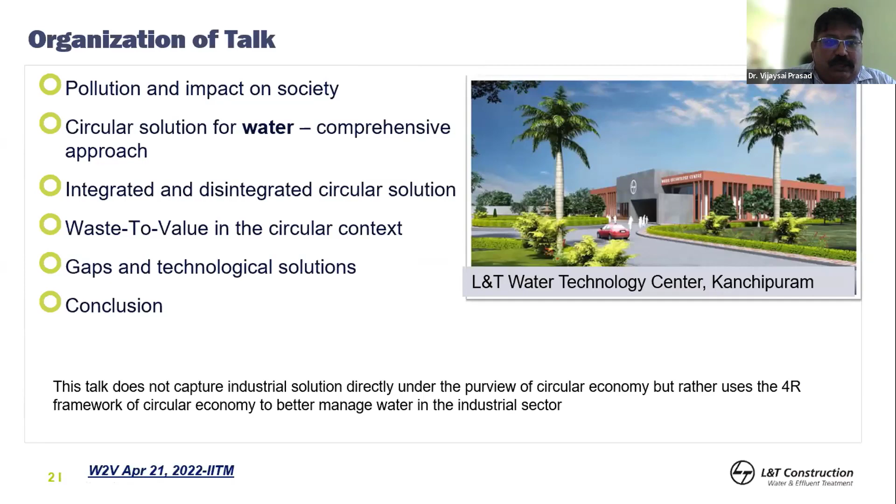So very soon into the next, interesting part here. I always find it quite amusing because it is always said 114 civilizations existed on the surface of this planet, out of which 112 disappeared, and only 2 continue to survive—one being India, the oldest one, and the other China. There are many civilizations that unfortunately we don't get to see—for instance, Easter Island, Mayan, Anasazi, Akkadian, Ubar, and the list goes on. That's plenty of a list there which unfortunately we don't see.

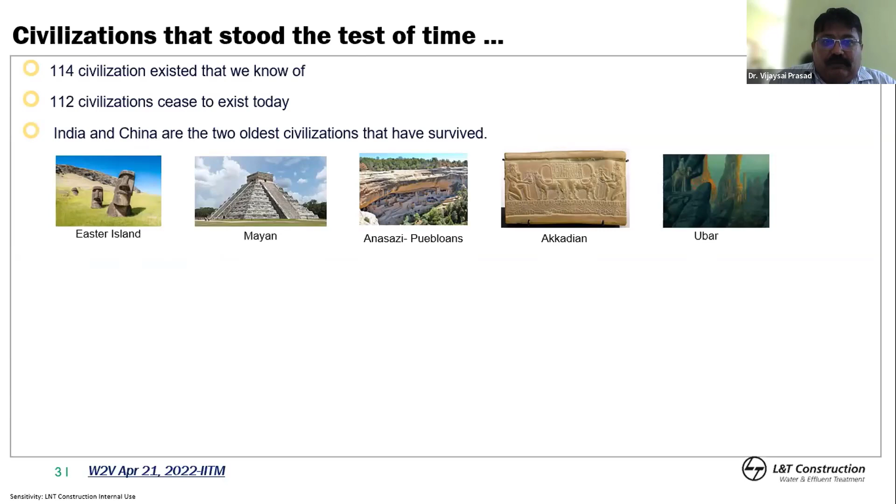So basically, when we look into what has led to the disappearance of these civilizations, the factors responsible—studies today indicate climatic change to be the prime reason. Droughts, the water level receding, and the shifting rain patterns, and several other factors led to the fall of the civilization. But more importantly, the civilization did not adapt to the change, which was the main cause stated. The climatic conditions changed, but this adaptation was missing, and that's why we don't see them surviving today.

Now, having said that, why is it relevant for us? Why should we be caring about it? Because we are already witnessing the trajectory as far as the change in climatic conditions are concerned—9 parameters out of 15, or even 10 out of 15, global tipping points are being witnessed today, which is definitely an alarm that we all have to wake up to. That includes the rise in sea level, the temperature, and glacier melting, and several other factors out of 15 which indicate that climatic change is going to happen. It's happening, and it's reaching a level that is contributing to societal collapse.

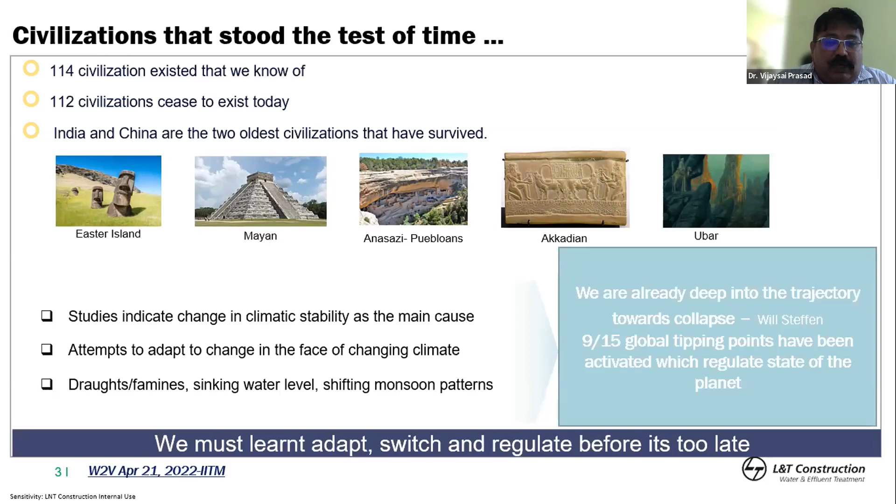This is something that we are forcing upon ourselves, and that's why it's all the more important to regulate before it is too late. With that message, I just wanted to quickly move into the next topic.

These are predictions that are coming from the past. In 1970, Alvin Toffler, a famous US writer, published an interesting work on how we as a civilization moved through different phases: the agrarian wave, the industrial wave, and the information wave, all of which have happened in the past. Now we are in the information wave at present. The transitions have been very interesting - some took several thousand years, some happened in centuries, and the last one, the information wave, took just about a few decades. That's where we are today.

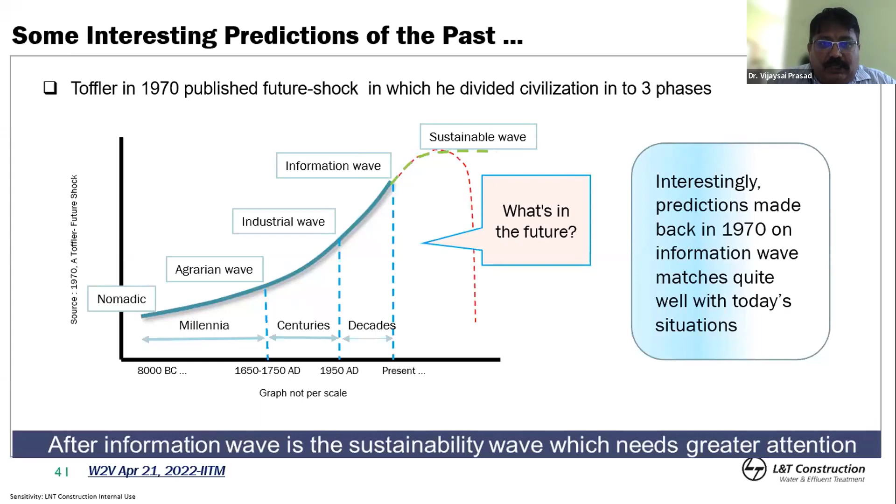But the question is, that's all good, so what is in the future for us? That is what we call the sustainable wave. Maybe the curve will plateau down and then sustain, helping us with all these things. But the way in which we have been exploiting, extracting, and misusing and abusing resources - will it allow us to stay there, or will it plummet? What is the future trajectory looking like?

That's where another study that happened in 1972, around the same time, which we call today the World3 model, comes in - a dynamic model used for prediction of the fate of civilization. This was a very interesting outcome. What was seen is that by 2040, the model predicted societal collapse. So it's after all a model - why do we care about it?

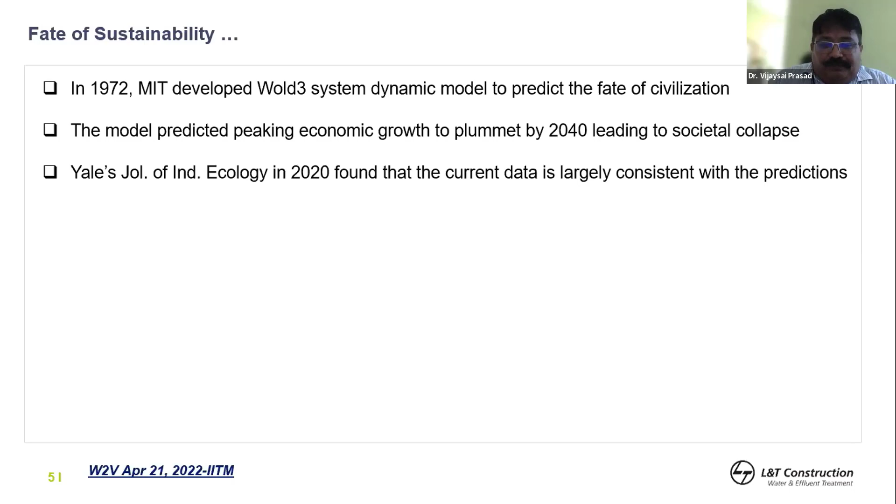Why should we be thinking about it? That's not the case, because in 2020, Yale's journal actually published that most of the predictions seen until now are consistent with what was predicted way back in 1970-72. Now, what does that mean?

That means that if that is the curve, what is being shown here is business as usual - that if we continue doing what we have been doing, the pollution level is going to rise, and the increase in pollution level is going to bring down significant changes as far as our population is concerned. You can see that from 2040 onwards, it's going to get down. The industrial production is going to come down, and food production mainly is going to get affected.

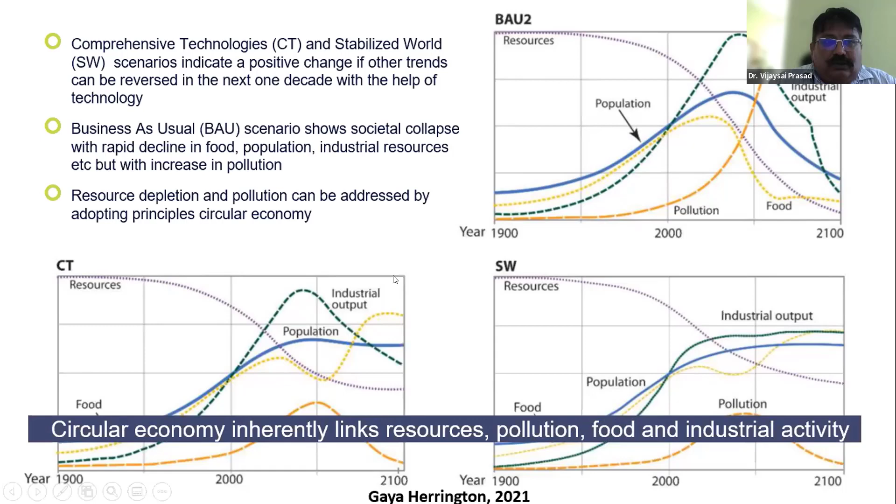So all kinds of deleterious effects are going to be seen if we continue to pollute the way we have been doing. But on the contrary, if you look at comprehensive technology as a solution - that means if we try to contain the pollution here - that's basically going to give us some time to breathe, and then things will get settled down. That means the main challenge for today is the pollution, and if we contain it, if we are able to bring it down, that's going to give us enough time to survive.

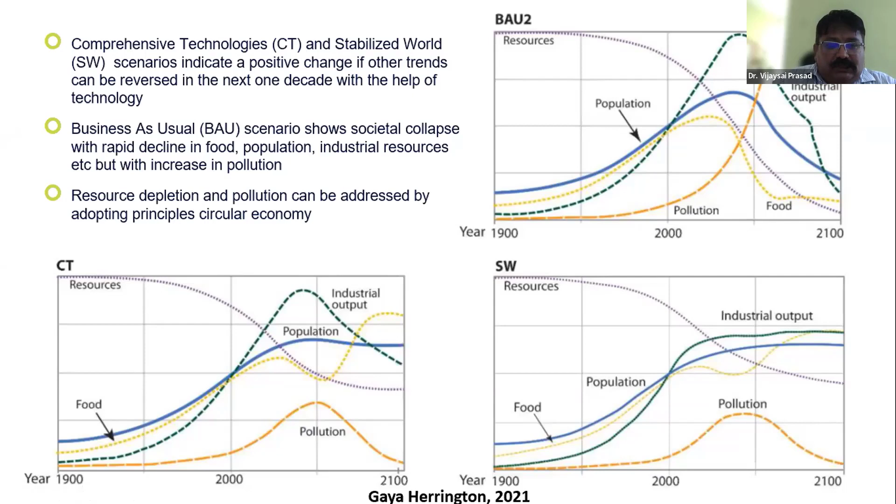And then continue to happily live from wherever we are now. So that being the case, what should be our major focus? That's where the entire world is moving towards: renewable energy, cutting down carbon emissions, and doing everything possible in the circular context, because we have been linear all along. We were very happy exploiting resources - take, make, and reject - and we have caused significant damage wherever possible. Now, if we don't wake up, if we don't react and take up corrective actions, then the situation is not going to be conducive.

So with that, we will just take a quick look at the situation we are in as far as the industrial water scenario is concerned, because water is going to be the topic that I am going to talk about, and I have kept it mostly restricted to the Indian context today.

So when we talk about the water industrial scenario in India, it's a known thing now - we have been extracting groundwater crazily. 253 billion cubic meters per year is getting extracted, and around 89% of that groundwater is being used for agricultural purposes. 5% goes to industries and 6% for domestic use. But then what is the funny thing about it? India has 17% of the world's population, but that's not the proportion in which the water is available.

We have only 4% of the world's water as a resource, and only 2.6% land. But the way in which we have been using water, particularly groundwater, is alarming. 1/4 of the groundwater globally is being consumed just within India, and that is more than US and China put together. That's a very alarming situation we are in today.

Going forward, industrial needs are going to increase further. When we look at the overall industrial water draw in 2015, it was around 10%. By 2050, that share is going to increase further to 17%.

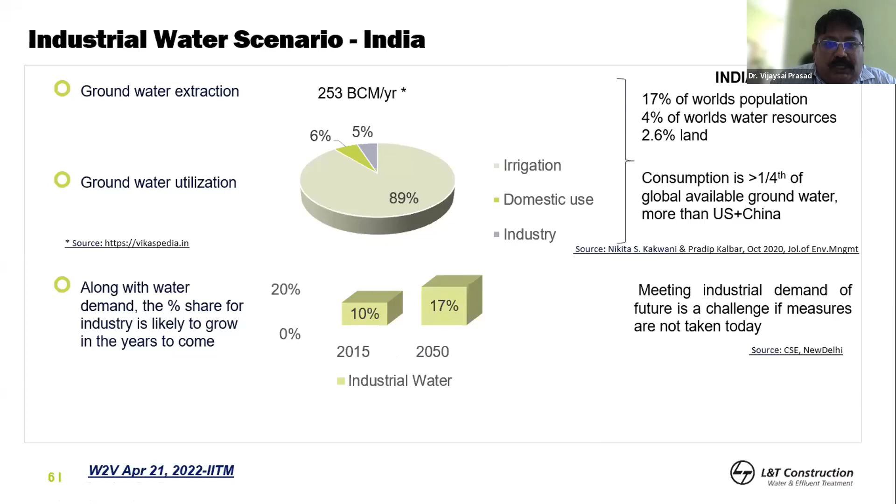The industrial demand is going to rise further, and how we meet that is going to be a challenge, evident from the tariff. In 1995, the Chennai water cost was around 12 rupees per cubic meter, and today it has touched 55 to 60 rupees per cubic meter.

That's why it's all the more important to conserve water, preserve water, and bring circular economy concepts deeply into water, because circularity needs to be integrated in every sense. We cannot just talk about water alone.

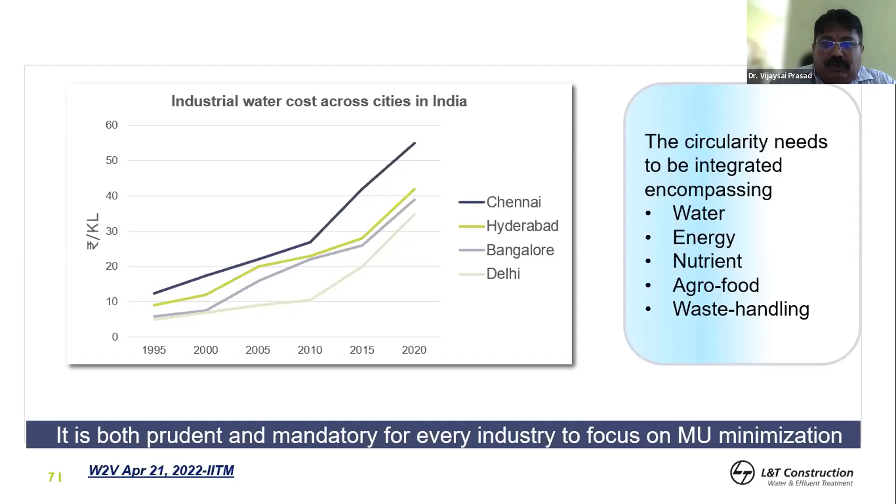You produce, reuse, and recycle—but that's not the only thing, because we have to consider all other aspects associated with it: the energy required to treat the water, the nutrients present in it, how to extract those nutrients out, and how waste handling could be dealt with. This is all something we have to consider in totality.

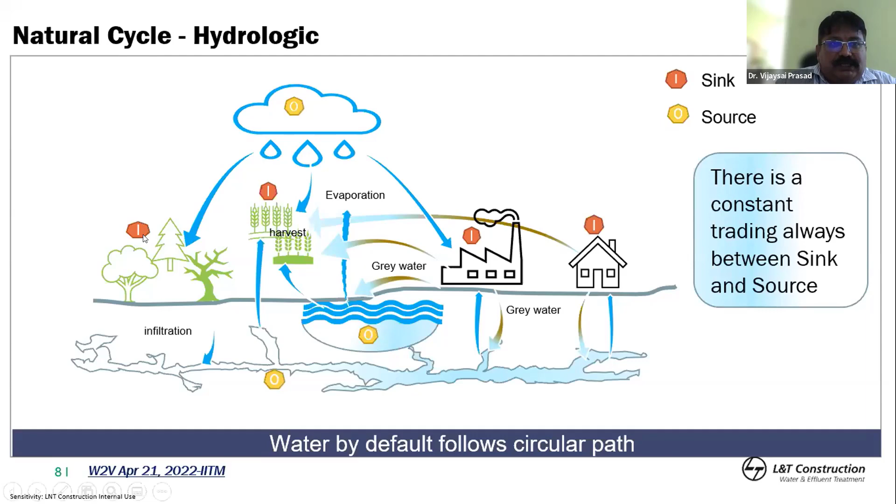When we look into the natural hydrological cycle that water typically follows, we have rains, essentially from cloud formation through evaporation and transpiration from trees. Then we have groundwater, also used by industries for household applications. The gray water gets treated and put back into water resources. This whole cycle by itself is circular in nature. As far as water is concerned, the natural path it takes is by default circular. So when we consider the interaction between sinks and sources, circularity is guaranteed for the natural path.

But when we look into the managed cycle, particularly when human activities kick in, this takes a different approach, because you've got to bring in energy between the sources and sinks to make water available at the required rate, quality, and with all the required ingredients. Then we have the waste generated during treatment when the water has to be pushed back into the cycle. Now we've got to manage that waste too, so complete circularity just from the water perspective is not adequate here. We've got to understand what the source of energy is that we're taking in.

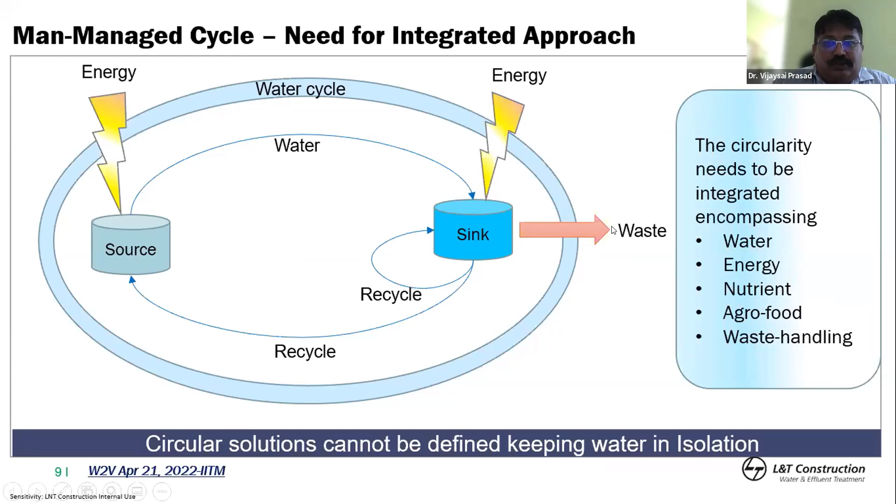As the previous presentation alluded to, the energy sources are very important—even the source of energy should be something that guarantees circularity, something renewable, and even the waste that comes out has to be dealt with appropriately.

So this particular concept involves sources and sinks. The sources could be plenty—starting from rainwater through surface water—and the sinks are industries, domestic, agricultural, whatever we can think of, along with a water treatment and management system. The water treatment system generates water, and at the same time waste is generated. The whole concept is how we maximize the value out of the waste that comes from water treatment. In this context, I'm going to focus attention on the water part, the sludge generated here, and the waste generated here.

How do we derive energy out of the waste and put it back into the system, so that whatever energy requirements we have in terms of treating this water can be met by the waste that is being generated? That's the decentralized circular economy concept we are going to see now.

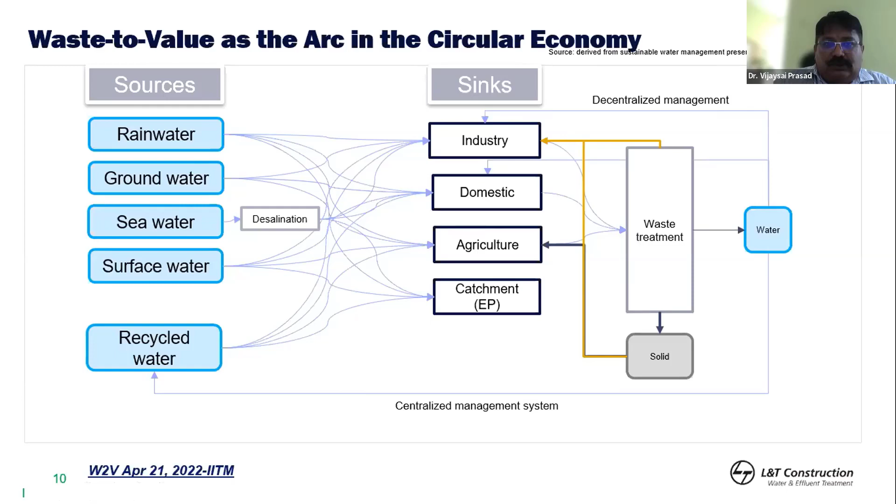And they basically rest on four pillars that we can think about: reduce, reuse, recycle, and reclaim.

Reduce is nothing but makeup water reduction—you reduce the fresh intake you are going to have. Reuse is basically repurposing the water for a different application: you take whatever comes out of one unit operation and put it into another. That is repurposing. Recycle means you treat the water in such a way that it can be used again by the same process from which it is getting generated. And if you can get any resources extracted out of the water, and also send the water outside the current loop for which it was initially purposed, that becomes the reclaim part.

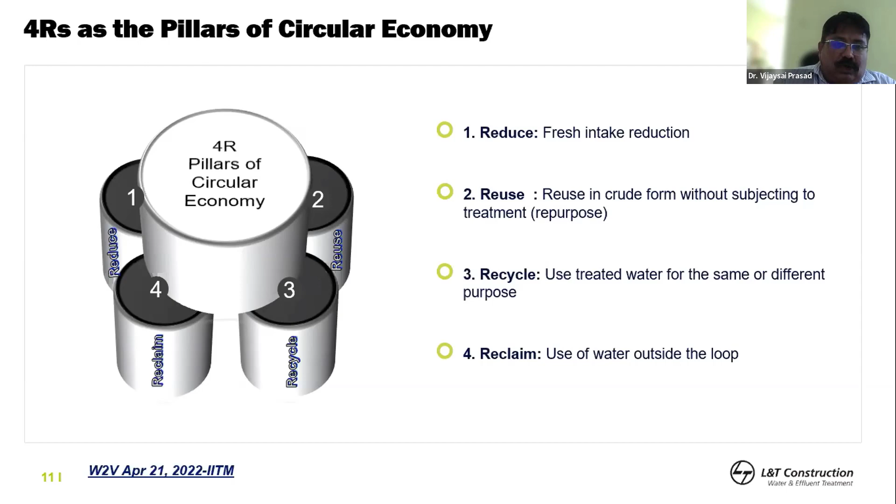So in these four R's, which define the circular economy context for water, I wanted to share how we in L&T are essentially looking into it.

The focus of this talk is particularly on municipal wastewater treatment and the context relevant to India today—what is the Indian context as far as sewage treatment facilities or sewage treatment plant operations are concerned?

Municipal wastewater is getting generated to the tune of about 72,000 million liters per day. We have an installed capacity of not 72,000 MLD, but only around 31,000 MLD. The operational capacity is only 26,000 MLD, and the actual utilization happening today is only 20,000 MLD.

So there is a big gap in the amount of water getting generated today—from 72,000 all the way down to 20,000, which is the actual installed capacity or utilization we have today in the country. Only 26 to 28% of the sewage water generated is being treated and made discharge-friendly. That's a very challenging situation for a developing country like India, because we have to go three times more to meet the situation developed countries already have.

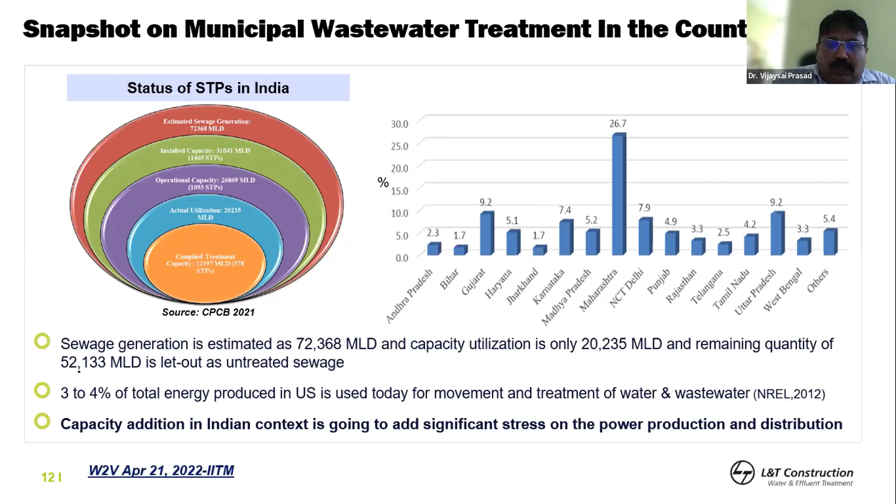Coming to capacity addition, we need to plan what stress it is going to have in terms of power production and distribution, and how we are going to maximize the overall efficiency of the plant—how are we going to use the current capacity of the plant to get that adequate energy?

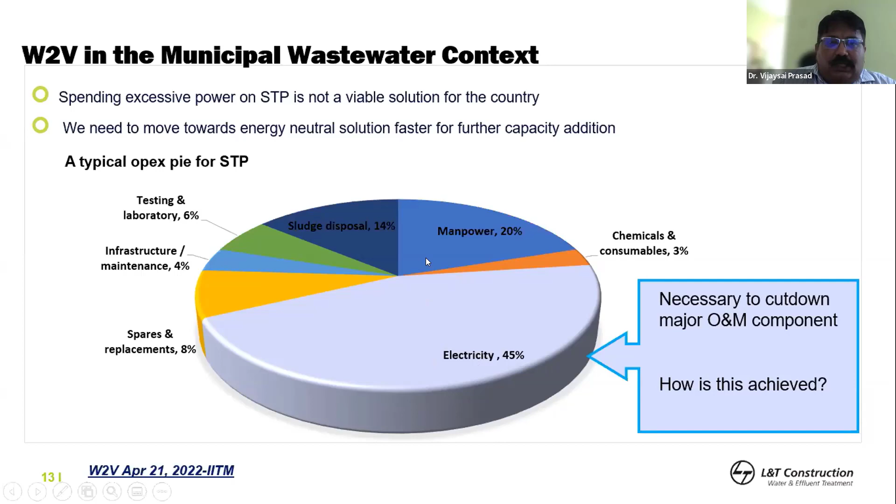So this is where we talked about the waste to value concept for one of our plants. What has been constructed at Delhi, called Coronation Pillar, which is in fact one of the largest sewage treatment plants today in the country, of 318 MLD capacity, which was inaugurated very recently. This is basically an anaerobic, anoxic, and oxic process with biological nutrient removal, in fact phosphate removal.

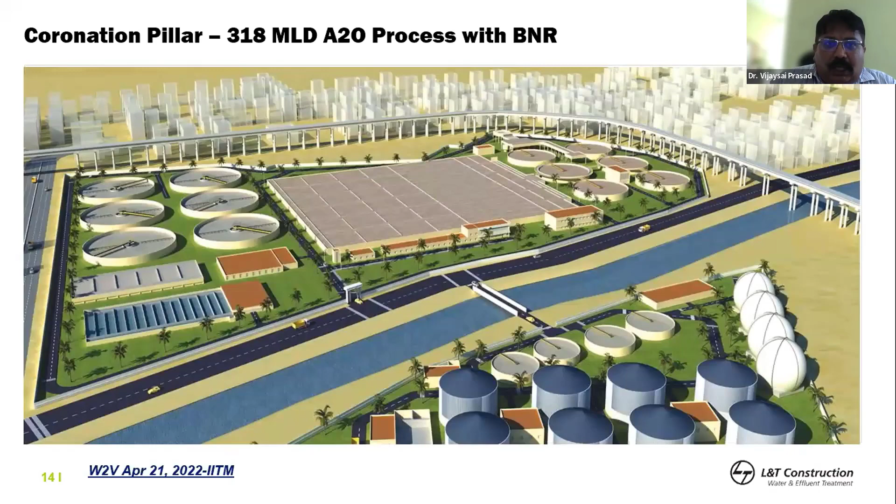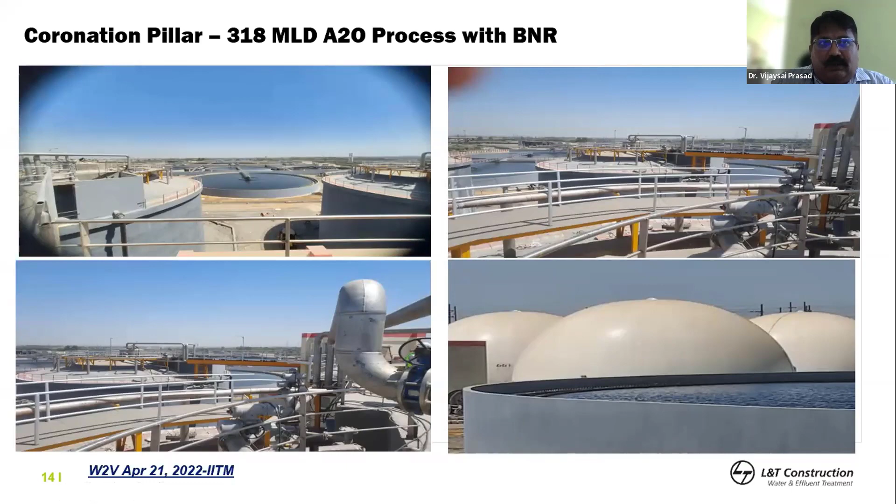So this is the conceptual view of the plant, but there are some pictures taken just to show what the various components are here. The one in the bottom towards the left is basically the digester, which is used for generation of electricity here - I'll come to that part - and of course the gas storage facility for the biogas that is getting generated. So that is a kind of concept towards the waste to value.

Now, if we have to make this plant somewhere where we can maximize the energy utilization - because that's the factor we are seeing from the operational cost which can definitely be reduced, and also to push the whole solution towards the circular economy - it's also important to understand how we can factor in the energy management point here.

So that's where we can think about pushing the sludge into an anaerobic digester, from where we can have the biogas generated. The biogas can be treated and eventually pushed into a gas engine, which is going to generate power. So all the parasitic load of the plant can basically be met by the sludge that is getting generated, and then with the gas that is getting produced. That's an amazing output that we can achieve.

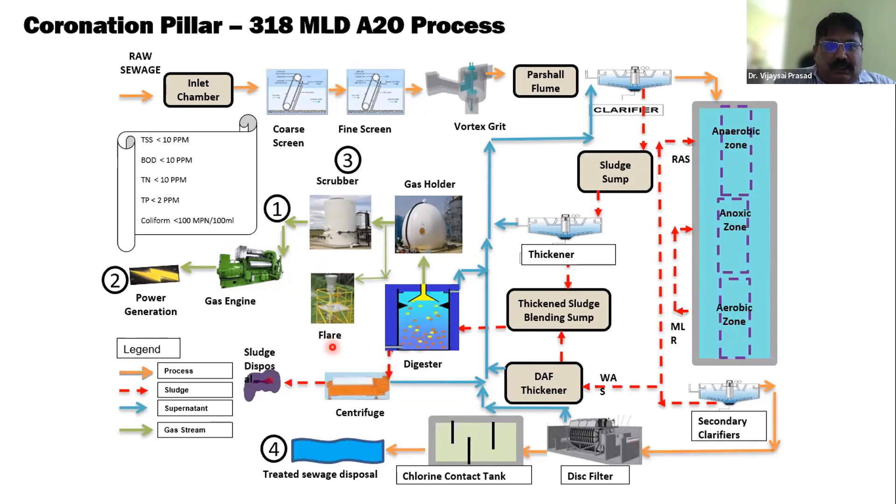Many countries are doing it, and we have also started implementing this whole concept more. But it's all the more important that irrespective of capacity - whether it's a huge plant or even a small plant for treatment - that plant should be able to move towards the energy neutral solution. Then that is an icing on the cake. So there are all the concepts of circular economy, which is basically reuse, recycle, and reduce - everything is actually part of the solution we have put together here.

To summarize this whole flow sheet, we can think about a primary clarifier, the A2O process, and finally a digester, gas cleaning system, and sludge thickening system, and finally the gas engine, which we can think of as the core components of this whole solution.

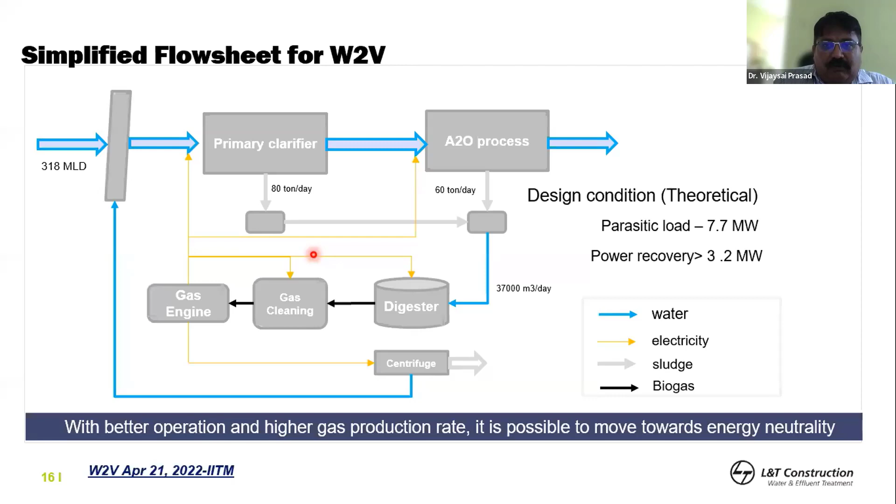So the parasitic load today is around 7.7 megawatts, which this plant consumes, out of which around 3.2 megawatts can be produced just by treating the sludge, and then supplied back to the plant, so that the overall energy requirement of the plant can come down substantially. That is the way in which this solution is very promising - that's the waste to value solution in the circular context, which is exactly an operating plant live in our country. Now the question here is, what more can we do?

Is there a way to basically improve the situation further? There are multiple approaches to that. We can look into different ways in which we can maximize the overall energy utilization and take the plant from today, wherever it is, towards the energy neutral solution, because there is still a gap of about 4 megawatts, and we need to understand how to bridge that gap. There are multiple ways in which we can do it.

Solution improvement is possible through all these steps, as has been talked about. If you look into process benchmarking, which unit operation has to be used for which purpose, how do I make sure that a purpose is met with minimum energy footprint, that could essentially be part of the process benchmarking approach. Process intensification is about reducing the energy intake that a particular process demands, and how we make it more economical in terms of energy requirement, while still delivering the output that the regular process would.

Now, process innovation is a big gap that has to be addressed through technology innovations. There are technologies talking about microbial fuel cells, which again need to be sustainable and reliable. It takes time for that technology to mature. Biohydrogen could be one such thing, and there are multiple ways in which we can achieve energy neutrality by investing and trying to understand things better.

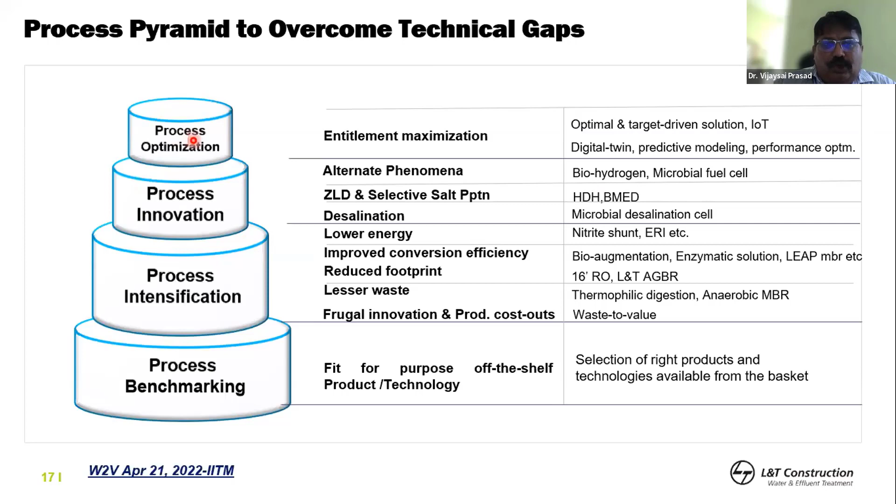Process optimization is all about the digital solutions which we are consistently using across the spectrum, and how we bring digital twins in order to manage the process better and improve the overall performance of the process.

Just towards process intensification, I wanted to share one last slide. This is where we came up with trying to understand which unit is going to consume maximum energy. Of course, when you talk about sewage water treatment and the aerobic system, the blowers are the power hoggers there. They are the ones that take maximum amount of energy in sewage water treatment or any aerobic treatment for that matter.

So this is where we came up with a new reactor, a hybrid solution which uses both attached and suspended growth combination in order to give better energy efficiency. We could demonstrate how the quality of the effluent with this reactor could be improved, the footprint reduction was better, the power consumption improved significantly, sludge reduction was possible to a large extent, and importantly, capex and opex were significantly better with this. That is the process intensification we have been working on, and this reactor we developed in order to bridge that gap.

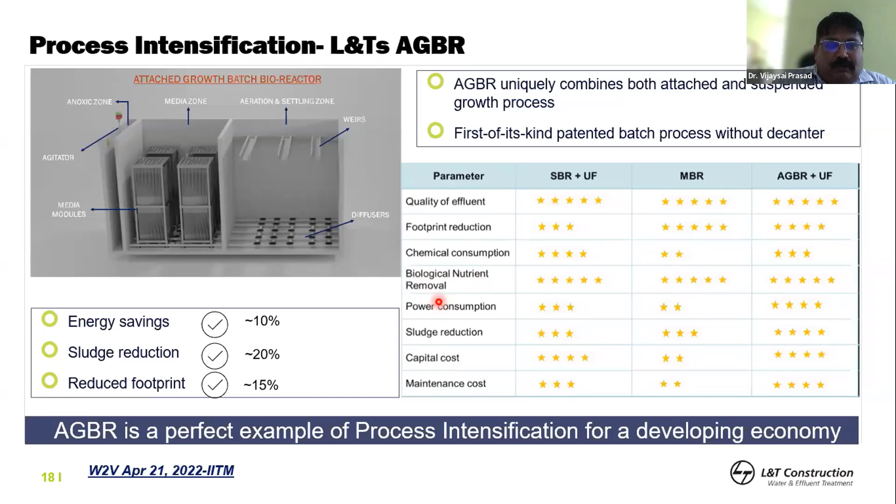So I wanted to conclude my talk with the limited time left. We have to consider the 4R concept in our water solutions, and that should not be in isolation just in terms of treating the water, recycling the water, reusing the water, but the concept should be expanded further to the energy part, and we have to understand how the waste is getting managed.

At the same time, it's more important today that we are using membranes, for instance RO membranes, ultrafiltration membranes, electrodialysis membranes for various applications. What will happen to them after they are used? That should not be something which ends up in landfilling at the end of the day. So the totality is very important when we talk about the water solution, that every component should fit into the definition of circularity.

So significant advancements are possible. There's a lot of gap for research, and we have to understand how to fill that gap in order to drive the solution towards energy neutrality and finally make every solution energy positive later on. With that, I just wanted to conclude my talk here, and thank you so much for giving me this opportunity.